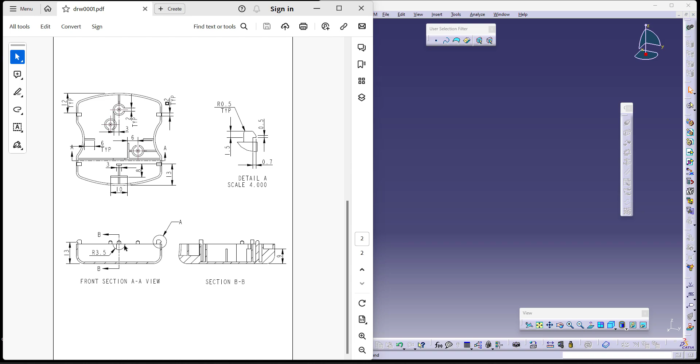This is the section view for the internal features for better understanding of the internal features. There is also another section view which is cut over here for us to understand the internal cuts, which is the semicircle cuts, etc. So let's start making this model. We'll go one step after the other.

It's a plastic cover. To achieve these kind of shapes as well as rounds, we'll use the surfacing module so it can maintain the shape perfectly. These cuts are also made on a surface. As you can see, they're projected onto the surface, which is your circular shape.

Now, to begin with, under start mechanical design, since we're working on surfacing, I'll be using wireframe and surface design. While using wireframe and surface design, it is important for us to make the sketch first and then work on it. So let's try to make the sketch. The whole wireframe and surface design works on your points, your sketches as well as your lines. So understanding that, let me take a line here and then mirror this onto the opposite side. I am trying to make this shape and then later remove these off of the existing surface.

Now I have two lines and I have the distance between both of them. It is 50. Now I require arcs over here. And this is actually supposed to be 60. You can mirror this onto the other side, because since we have not maintained the mirror on the lines, you can trim off the unnecessary portions and keep the shape as you can see. The other important dimension they have given is the overall length from arc to arc, which is 56. So let me take the overall distance from arc to arc as 56. This is the actual shape for the base of the plastic cover.

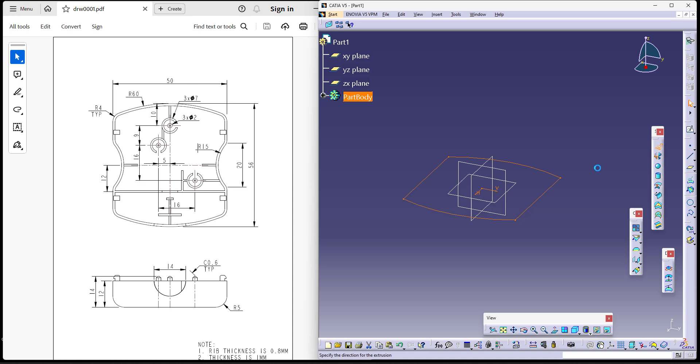Now once I exit, to add material you can use extrude, which adds it in the form of a surface as you can see. The reason again why we are using surfacing and not a part model is to achieve these kind of shapes or these kind of cuts. It is impossible to do when you're working on your part model. You might not get the exact shape. You might get some shape but not the exact shape of the cover.

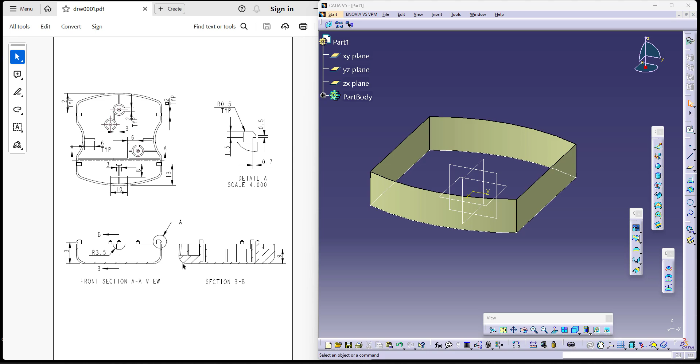So this is only up to 12. So I'll just take it up to 12. The other ones are for your fits as you can see. Okay, now by this we can understand that the bottom portion should be filled. As you can see, there is a section over here which has material. Before that, let's try to achieve this shape and then slowly do our further commands.

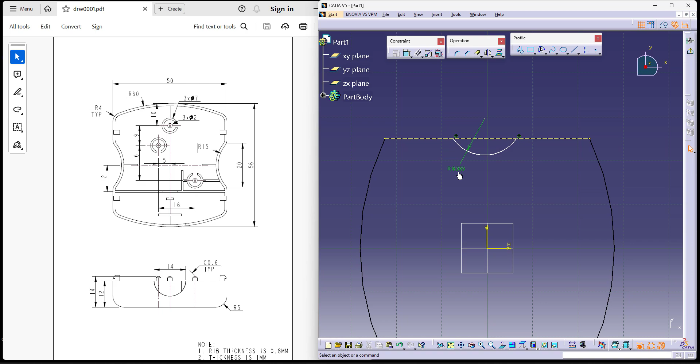Let me hide this and start making my sketch. And this is my reference which I'd like to use to do so. And then start making my arc. You can change it to the top view. I am comfortable doing so. So this is the dimension for it, which is supposed to be 15. As you can see, it's shown over here. And the center should be lying on this center. The dimension between these two is supposed to be 20. Again, it's given over here.

So once you exit, you can add material to this. I am adding it similar to the base, so you can trim it off very easily. And I'll be using a simple trim command between surface and surface because that's an easier option to do the trim. I can mirror the sketch using a simple mirror symmetry command onto the other side and perform the same operations like I have done before.

You will not be able to do a trim mirror. So I am repeating the whole thing again. But while doing an extrusion, it will ask you for a direction. You can just provide it with respect to your plane or your axis. Now let's try to trim again. It shows you this feature.

Since I've already mentioned that the base is filled, let's try to use a fill command to completely fill the base. You can directly use the fill command, or take a curve with point continuity and say OK, it will automatically fill the base. Since you are in surfaces, you cannot convert one surface into solid and then come back and convert one surface into another solid.

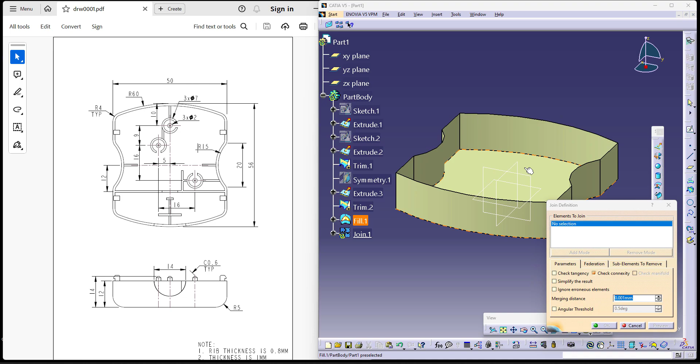The conversion from a surface to the solid should happen only once. It cannot happen multiple times. Only in rare conditions does that happen, but in this plastic model it does not. So to do that, we join both the base as well as the shaped feature and say OK. Now this will be one single surface.

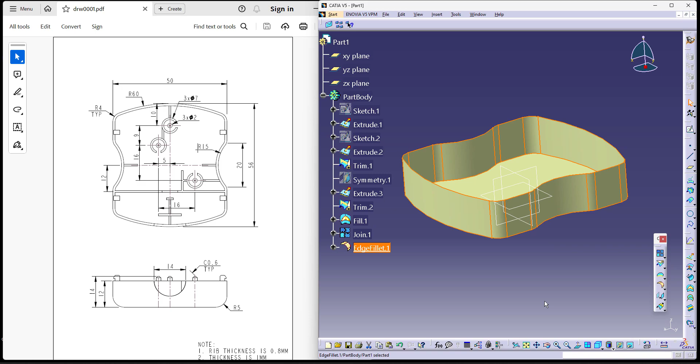Before proceeding ahead, there are a few rounds. We'll be giving those rounds in generative shape design, because the rounds option is called edge fillet. There are different fillets for all the edges. I have four edges, and as you can see, there's R4 for these edges, but at the bottom it's R5. So let me give R4 for these first and then R5 to the base.

It is necessary that you give all the rounds before converting it into a solid, not after, because when we add thickness to the model, the round does not take place exactly as it is supposed to. It might break the sheet.

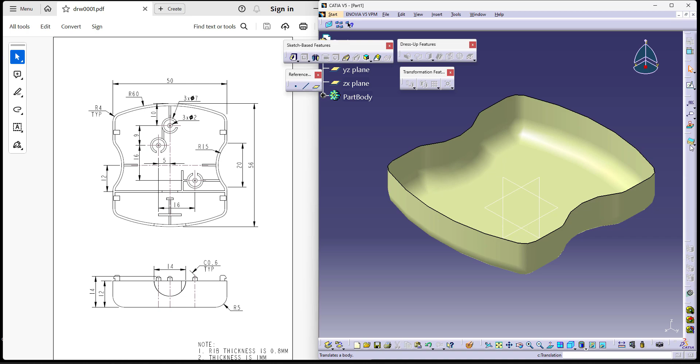Now going back, converting this into a solid, I have no other operations left to perform in surfacing. So I'll go back into my part design and convert it into a solid. If you don't convert it into a solid, none of your operations will get highlighted except for addition of new materials. So let me convert that into a solid. We know the thickness is 1, so 1 is already given, and say OK. This is your solid model.

From here, it's very simple to work on. It's pretty much like how you work on your part modeling. You can start working on it one step after the other and see how things go.

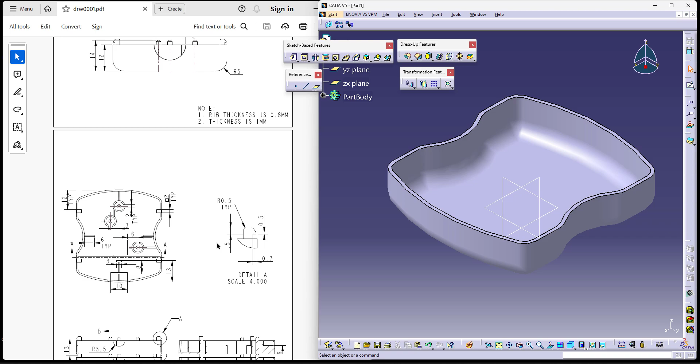Firstly, let me add these circles. As you can see, the 7 dia circles are actually of thickness 0.8. All thicknesses are actually 0.8. So I'll make these three first and then start adding. These three are in line with the face, that is this face, so I can directly create a pad and start.

Let me start by making these circles. I can use the direct pad command and start working on it, considering the top view. Let me go back to the top view so it will be easier to work on it. I have a circle first, and I have three circles total. Let me place those three circles and then start dimensioning them. They're pretty much of the same dia, which is already shown, which is 7 mm. So this is 7, and this is 7 as well.

Now let us try to constrain every single circle with respect to the dimension. This is the first dimension which I require and the constraint I need to give. The second dimension will be the horizontal distance from here to here. I need both anyway — this is 9, and the distance between these two is supposed to be 5.

Similarly, the distance from here to there is 16, which I'd like to give first. This is supposed to be 16, and the distance from here to here is also 16. Let me give that too.

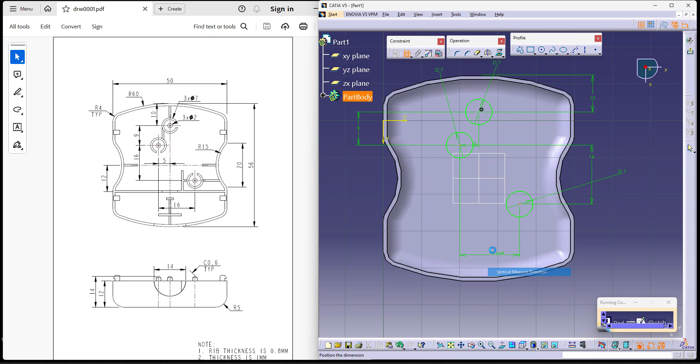These are all constraints, so once I exit you can see it adds material. I want it to be added up to the next surface it can find, so it will add up to the immediate next surface it can find.

Now for these I want to use a thicken option. There is something called thin pad which you can use. When I use thick, it starts giving you a thickness. The thickness is 0.8, so I'd like to use that, because what you're trying to see are actually two concentric circles. So instead of making two circles, I am giving you a thickness option.

There are other supports which are being used as well, so let me give those from the top. This is one support, and it's a very important one — it's over here, as you can see. So that support I'd like to give from the top, since it's already understood that it's from the top.

I'll be using these two as my references first, and then I like to make a straight line. We know the distances for all those, so it's pretty much okay for us to work on it. We know that the center is 0, 0, which is this.

So I'd like to dimension this from the center, because for us the dimensions are given from the center. This is still 12. So once I exit, it will start adding material from the top, and the 0.8 is your rib thickness as usual. So this will be a support.

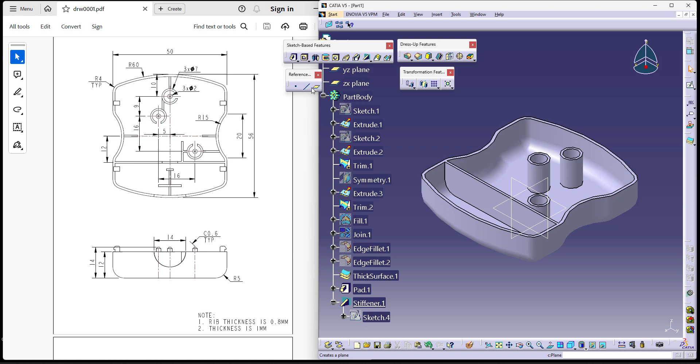Before going further, let's finish making these small circles, which are at a distance of 14 from the base. So we need to take a plane anywhere. From here, it is at a distance of 14.

On this, we have to make the addition of material, that is up to the next. We already have 3 circles. You can use these references first.

Now we can start working on your circles. This is the center of the circle. You will automatically get it. Similarly, you get the other center here for concentricity. Other center here too, again it will maintain concentricity. It takes the auto constraint by itself.

All you have to do is dimension it, and you can see if it is green or not. It is automatically green. So let me try to take this also, and let me try to take this as well.

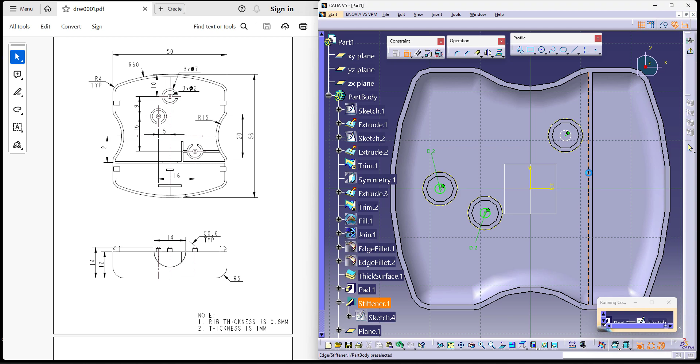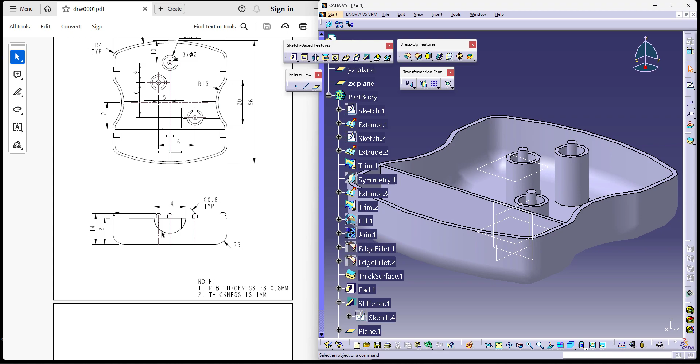Now these should be added up to the next. Since there is a chamfer operation, I'd like to give the chamfer operation a little later. Let me try to add these ribs first, and then maybe work on the other one a little further on. These ribs you're trying to see, they're actually from 12 mm, as I have already mentioned before.

So let me try to take a plane from the base at 12 instead of 14, of course. On the new plane, which I can see, I like to create supports. Again, supports are from stiffener, again from the new plane, and start working on your features.

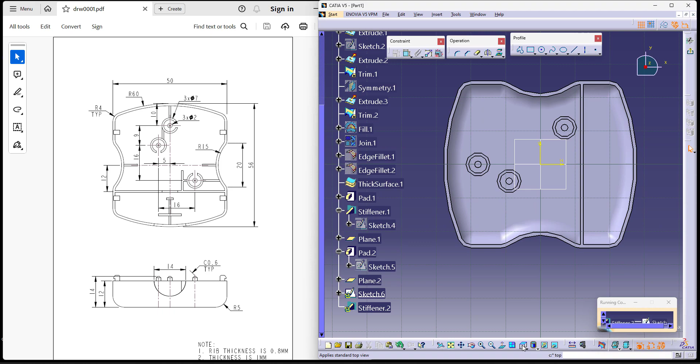I'm just trying to rotate the view. Now, there is one here exactly at the center location. So I'd like to use both first, and then start. There's one here, not there, sorry. I'd like to use these first. Let me try to give all the references possible and then start working on it.

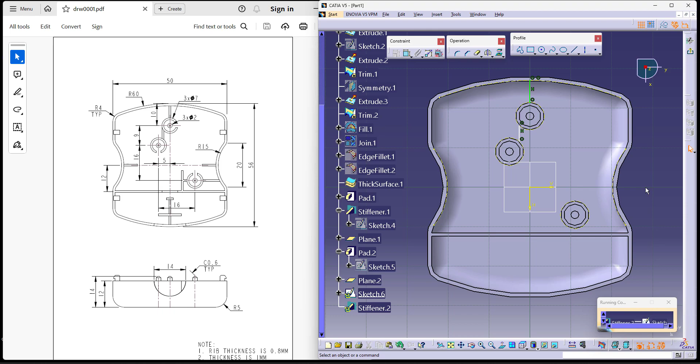Now, there's one line which actually starts from the center and joins this. There's also another line which starts from the circle and joins the other circle. Now, we do know the distance for this particular one. It's actually supposed to be 3.

I think it's given in this drawing. It's supposed to be 3. So let me try to take that from here to here as 3. The dimensions are actually given from the center, so it's a little more easier. Now there's also another support here, that is from the end till here to the center. I can use references also if necessary.

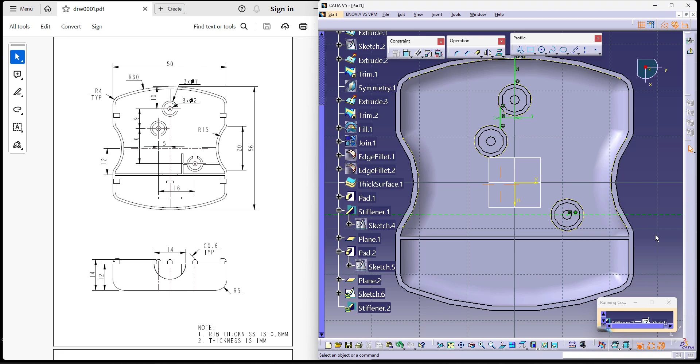I rotated the component. There you go. Now this is the line which I'm going to create. This is one support. Once I exit, it tries to create.

We need it actually from the top, so it starts creating from the top, and it is 0.8, so obviously it tries to create it.

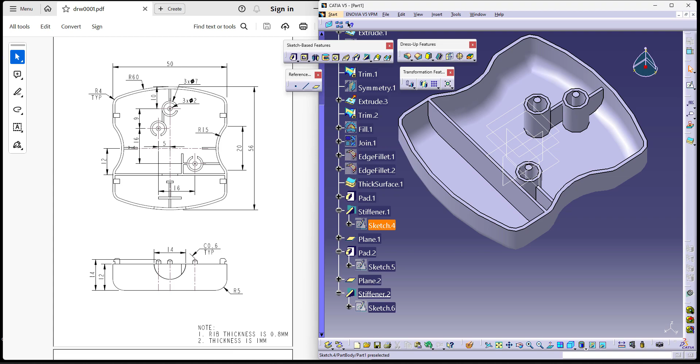There are 2 more supports exactly at the center over here, which will be in the front. So let me try to take the same one, but from the side and in the center. Now I'd be using my references. Here I can work on mirror command.

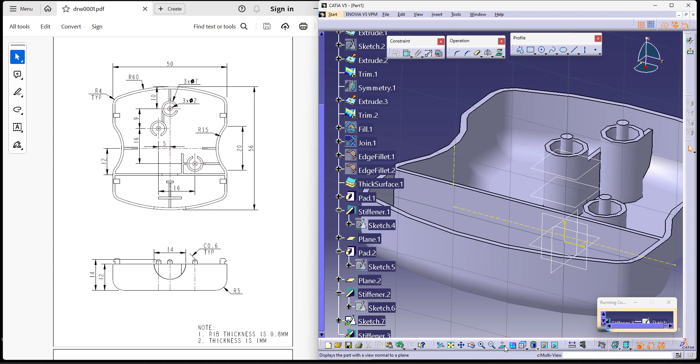So I'd be working on the mirror command easily rather than taking so much pressure of repeating the whole thing again. Let me go back to the normal view and start making my sketch. My sketch actually goes this way.

Since it's supposed to start from 9, we already know that the 9 mm plane is this. So I'd like to coincide the line on the plane instead of repeating the 9 dimension. And the overall thickness of this is given in the second sheet, which is 6. So I'd like to take this as 6.

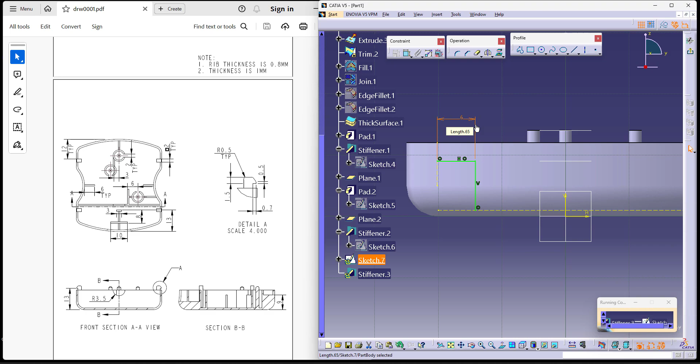And exit. This creates a support again as 0.8. I can mirror this same stiffener onto the other side. It's a little more easier for me to do this.

Now, same way I have a support here as well. So let me try to do that too. Again, I'm using the same support, again using the same plane, taking the front view.

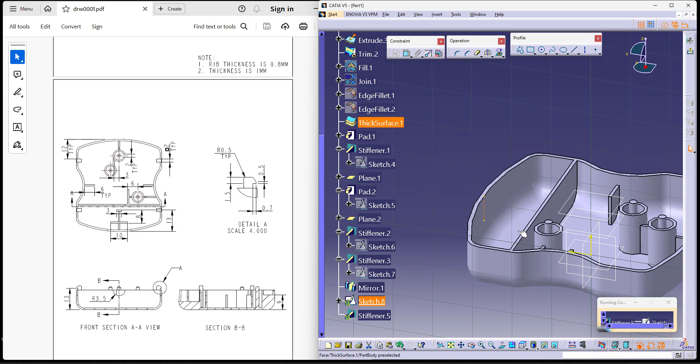I need to use this reference. I don't think I'll get it perfectly. I got it. And the base, of course, the base. Now, when you work on the base and stuff like this, it is necessary to understand how the shape is.

The shape is not from the top, it's actually from 9 and it goes till assuming there. I'll check for the length. Let me try to coincide this first. And the length is actually 13, as you can see here, it's 13. That is from the end of this, it's actually 13.

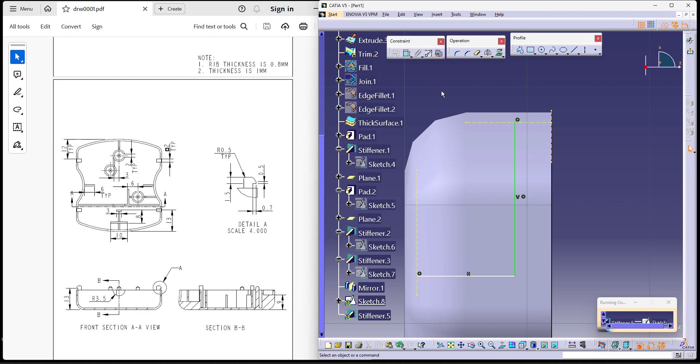So to give a dimension, I'll use this reference first, and then I can start giving the dimension from this to this as 13, because that is the end for me. And once I exit, it tries to create a support which is again of 0.8 only. These are my supports. Rest all can be added, it's not a big problem.

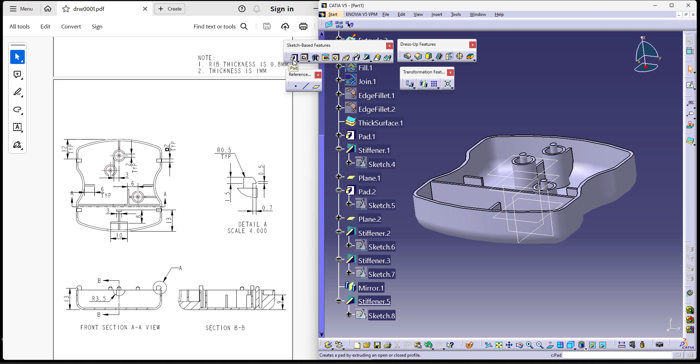You can use pad and start adding the material depending on where they're starting from. All of them actually start from 9, which is this plane. So you can make all of them in one go and work on it also. If you're not comfortable doing so, then you can just do it multiple times. I'm using it on the 9 plane, as you can see. Now the first one I'd like to add is over here.

This is my reference. Now the first one I'd like to add is the small rectangle over here, which is towards the inside. I'm taking a rectangle over here towards the inside. And I'd like to maintain symmetry with respect to the center first, and then start dimensioning it with respect to the center. I haven't selected the symmetry line with respect to the center.

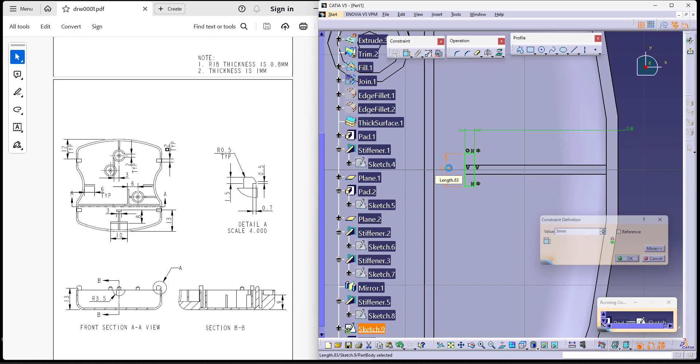Now we do know that this is 0.8 as usual, and the overall distance is 3. The 0.8 rib thickness is already given in the notes below over here. Similarly, I do have one over here which is at a distance of 8. So let me try to take that as well in one. I am trying to make all of them in one go because it will be a little more easier for me to work on it.

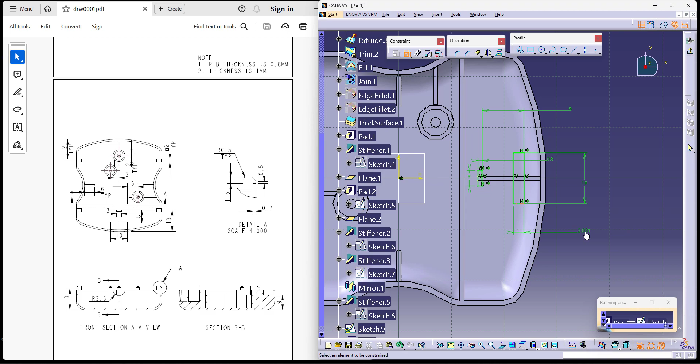Is this the symmetry line? This is actually 10 and it is at a distance of 8 from here. And we know that this is 0.8. Now, understanding the same concept, there is one more here, as you can see. Let me try to do that as well. There is a rectangle which should actually go over here, which should again be 0.8, not coincident with anything. The thickness is 0.8, it should maintain symmetry with respect to this center. So there I'll be using references for my feature.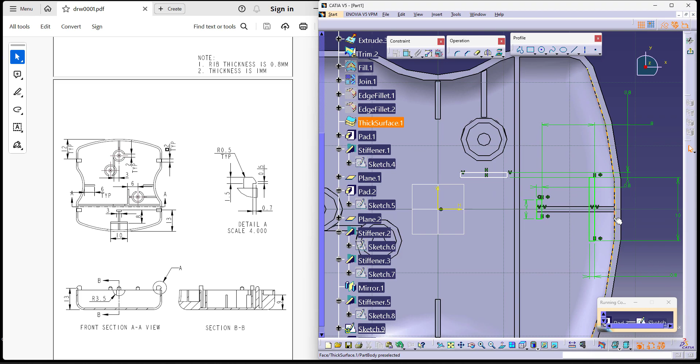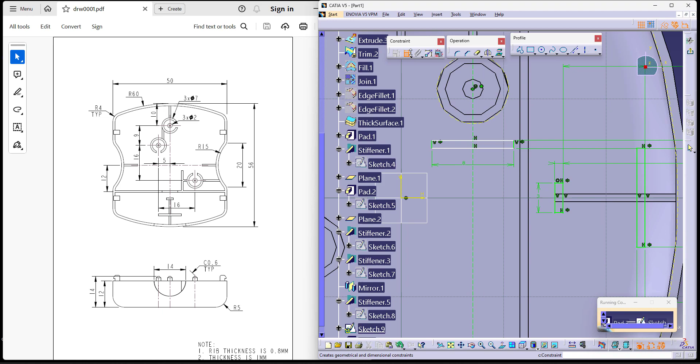And then start using my references because I need to maintain symmetry. Now let's try to maintain symmetry with respect to that line and give the dimensions one after the other. The symmetry line, the overall thickness of this is probably given in the next view or in the first view. It's probably 10, typical. So let me try to take this distance as 10. Maybe 8, it's not properly given in the drawing. Now, I do know that the distance from the center is 6, that is from here to here is supposed to be 6.

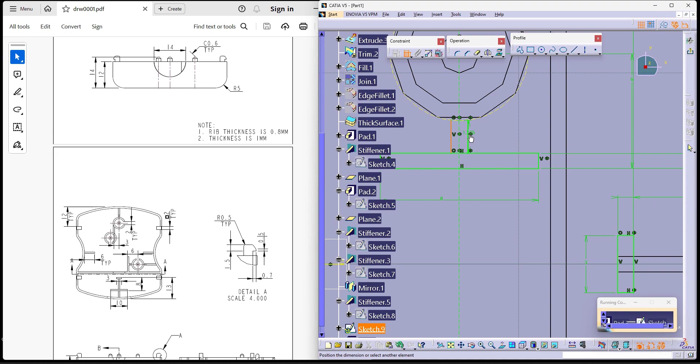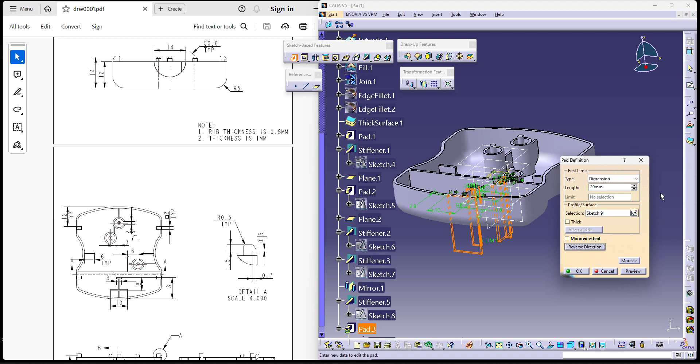So I'll give that as 6. Now, I require to add 2 lines over here and then maintain 0.8 again. So I'll just add one, mirror it, and then maintain 0.8. This 2 distance, 0.8. And then of course to get the arc over here, we need to maintain the arc, center, start, end. Now let's try to trim off whatever is not necessary over here. The sketch will be completely constrained, and once I exit, it will start to add material. Of course, I wanted to add it up to the next surface from the beginning, so it adds it. These are how you make your supports.

Now, working on your snap fits. Snap fits are actually starting from 13. I'd like to make this shape later. So from the bottom face, they are at a distance of 13. So let me try to take that as 13 first. On the 13 plane, I'd like to start adding the material and then mirror one after the other. It will be a little more easier for me to do that.

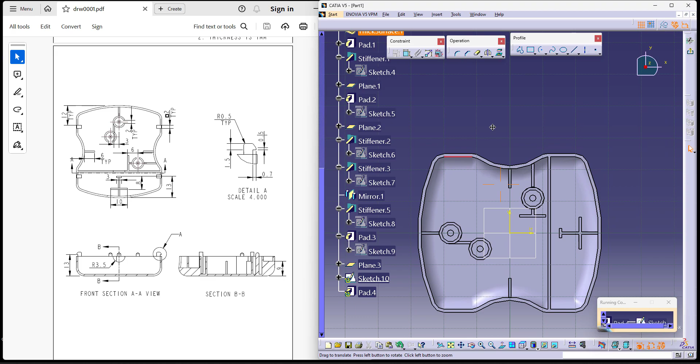Using this as my reference first, I'm trying to make a square. It is actually a square, this symbol represents a square. That means this is 2 and this is 2. Of course, everybody knows that, and it should be at a distance of 12 from here.

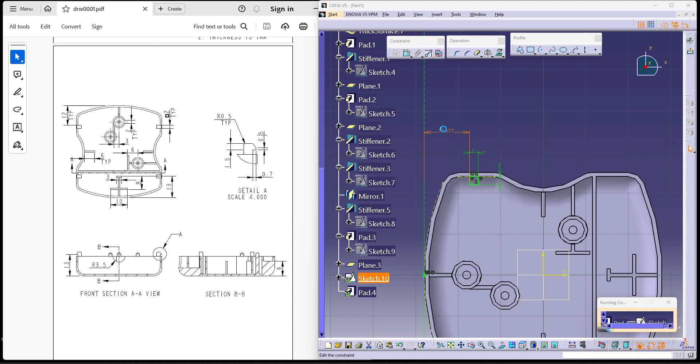Let me try to take a reference first and then maintain tangency. It's just not working with the way I normally do. Now the distance from this end to this is supposed to be 12. So this is a little more easier for me to do. Now when I exit, it will automatically start adding the material. Of course, I want to start adding it up to the next. This is the next. I can mirror it first, or let me try to make this particular feature and then mirror it.

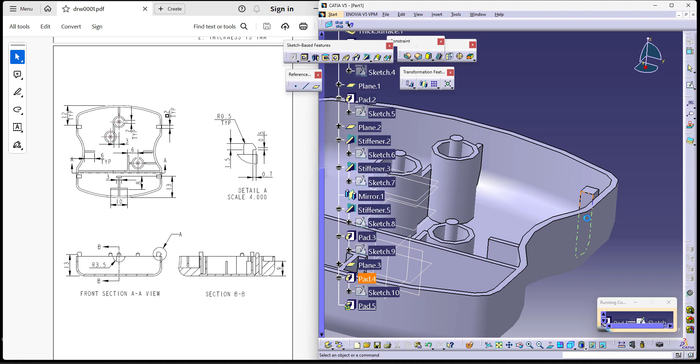So to do so, again I'm trying to use my pad command, but instead of selecting the plane, I'm trying to select the front face. Now over here, my references are these as well as the ends of the feature. So I'd like to project all three of them as my reference.

And then start working on the shape. Now the shape actually goes like this. I'll give rounds later, and then goes like that till the end of this, and then goes down, small shape this way, and comes down and then closes. I'll try to convert this into a solid shape. Now we can start dimensioning one after the other.

This is supposed to be 1.5 and this is supposed to be 0.5, and the distance between this and this is supposed to be 0.7. This is your overall features, and since these and these are in line, we require to give the height, which is this particular height. Let me try to give this height.

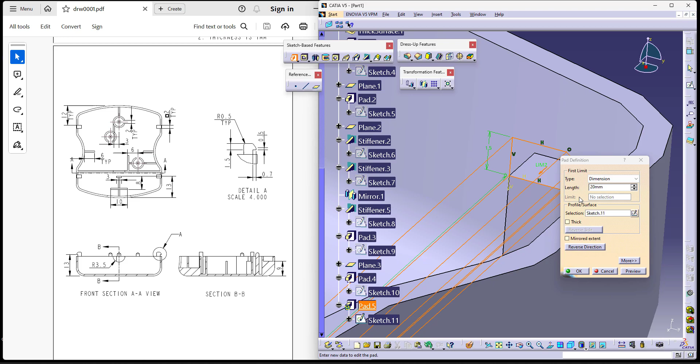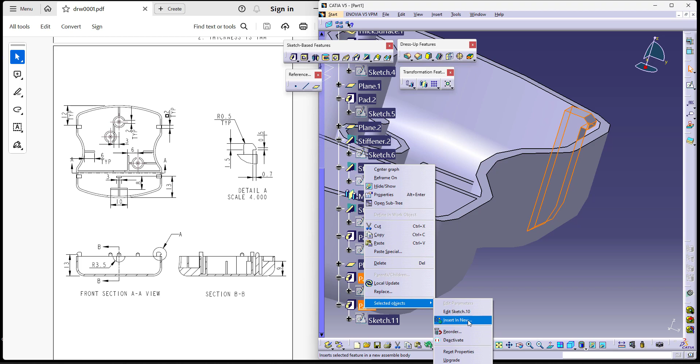Now once I exit, it tries to add the material. We want the material to be added up to the end of the fit. You can see the fit. You can give rounds a little later. You can actually group these two together. You can create it in a new body and then mirror it, or actually you can mirror it directly too.

I'd like to mirror with respect to this face first. It tries to create a mirror. Now similarly, I want to mirror this to this face. Okay, I'd like to mirror this with respect to the center. And then similarly, I'd like to mirror this with respect to the center. I can't mirror this as well. Okay, I might have to repeat the same over here because it's not mirroring.

Or I'll do one thing. I'll create both on one side and then work on it. While doing this pad and making a sketch, I'll mirror it onto the other side as well, just to be on the safe side. And then start mirroring it. And then I'll take these two and mirror it onto the front side. You get the mirror now.

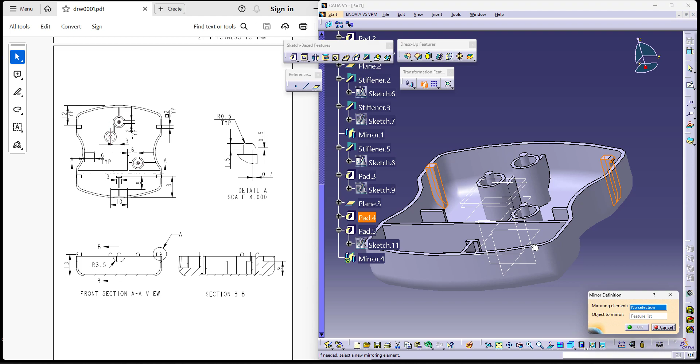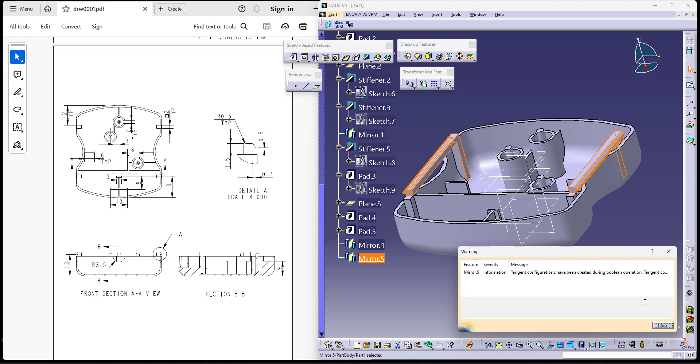Similarly, while doing the pad, I'll do the same thing. I'll again mirror the sketch. Let me take the front view. I'll mirror the sketch with respect to the center onto the other side. And then of course I'll do the same mirror. It does it correctly. Okay, I think the pad fails.

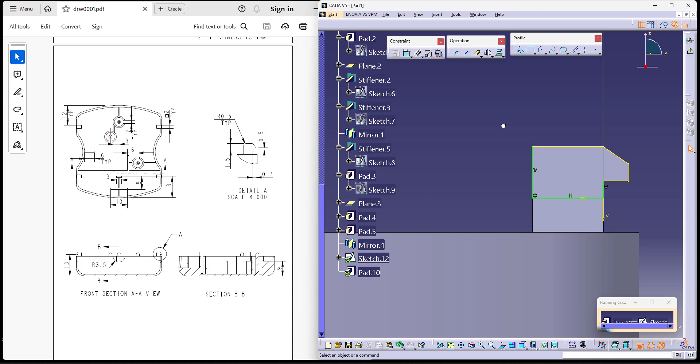So let me try to redo it here again. The pad is failing. I mean the end condition is failing. So let me try to redo this again. I don't have to do anything. I just have to take the projection of the previous one. So I'll just use projection and take the previous sketch and join whatever is necessary. And join these two. This can be mirrored again onto the other side and do it in one go.

While adding, of course, I want to add it till the plane. So let me try to select till the plane and select the face. This is how you work on your snap fit. Normally, you can directly do it in one attempt. But since there is a circular feature here, I required it to be added up to the next. So it took multiple attempts to do it.

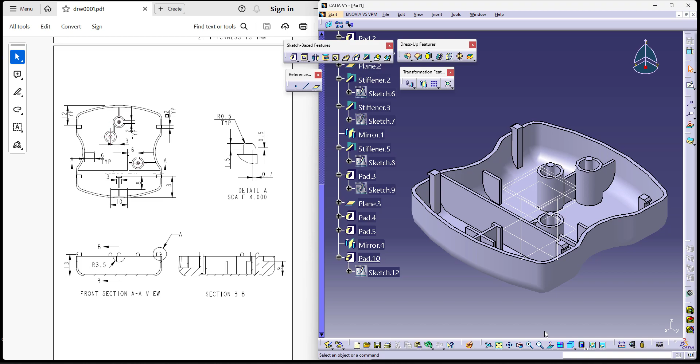Now last but not the least, let's try to give the rounds. Before that, there's a cut over here which I'd like to make using a pocket. Let me try to take the face and use this as my reference. Start making the circle. Actually, I'm taking a semicircle exactly located at the center, and the distance for this is actually 3.5

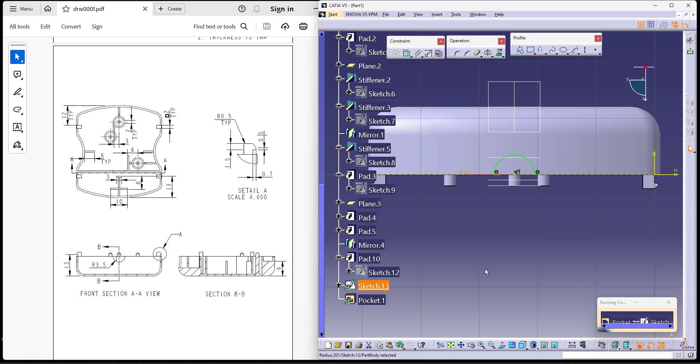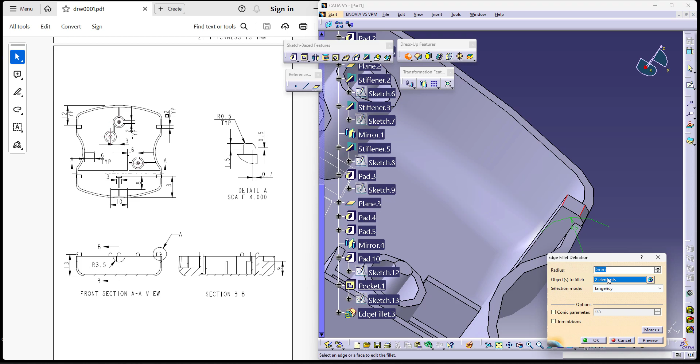radius, and cut it. Since we are working on solid modeling, we require to close the sketch and now try to cut it. We can cut it up to next it can find. And saying last but not the least again, let's try to give our rounds. We have our 0.5 which is over here and over here. Similarly, it goes on all the sides over here and over here.

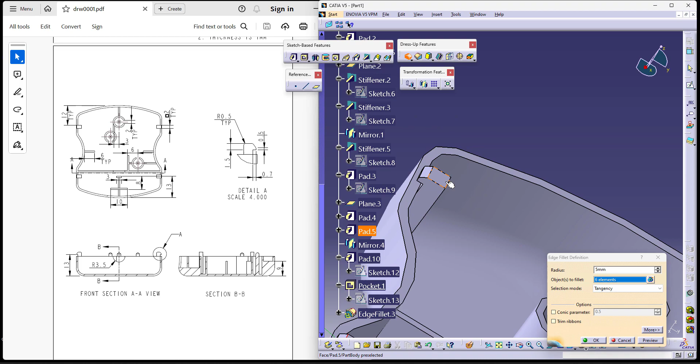And over here too, this is 0.5. And we have chamfer operations which are supposed to be done as well on these edges. So I do have one edge, the second edge and the third edge. The chamfer is 0.6, so let me try to take 0.6 and say okay, this is your chamfer. This is how you make a plastic model with your snap fits and control using surfacing as well as a solid model.